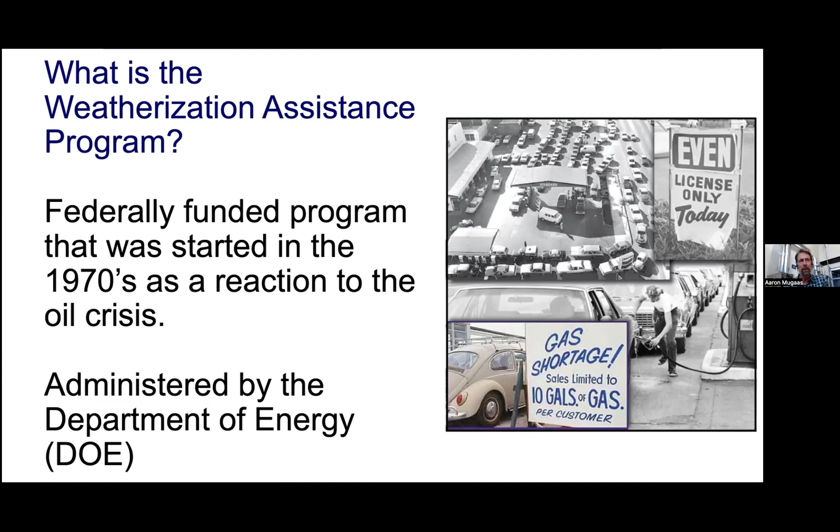Weatherization's a federally funded program, started in the 70s, and started in Maine. Community action agencies started just helping people make their homes more energy efficient by insulation and air sealing. And it's real rough and dirty work, right? I call it the front lines of energy savings. Besides the reduce, reuse, recycle that we all probably should be doing every day, this kind of work is kind of the front lines, the things that need done in most existing structures in America. The DOE is the main administrator of the program, along with some other participants also.

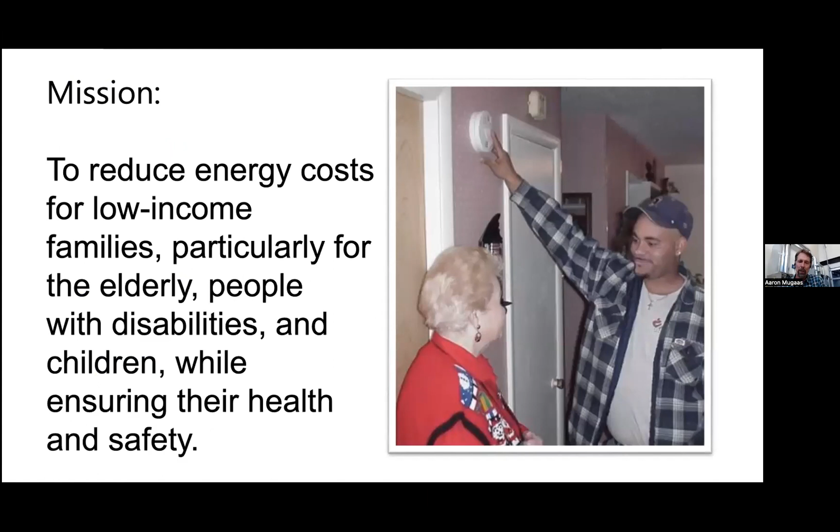So this is the mission: reduce energy costs for low-income families and the elderly, disabled, and children. And also we pay a lot of attention to the health and safety inside a home, indoor air quality, and things like that. Right now, the program supports a lot of jobs, and we work on a lot of homes every year.

$372 annual energy savings per home, and that's an average, but there's a pretty wide range of what we do to homes. It could be $50 a year, or it could be $1,000 a year. Depends on the age of the home and what we ended up doing on the home. So we've affected 7 million families since 1976.

Who does weatherization work? People wonder what this weatherization is. So the community action agencies throughout the country, here in Bozeman we call it the HRDC, the Human Resource Development Council, but there's a lot of different names. But they all are set up and generally federally and locally funded to take care of issues in communities. And one of the things they do is energy assistance. So they help people pay their power bills when they can't pay their bills.

And then the weatherization program piggybacks on that, and we work on those clients' homes to make them more energy efficient. So what do we do on houses? We are basically a shell program. It's the very unglamorous part of energy savings. Nobody ever sees most of the work we do.

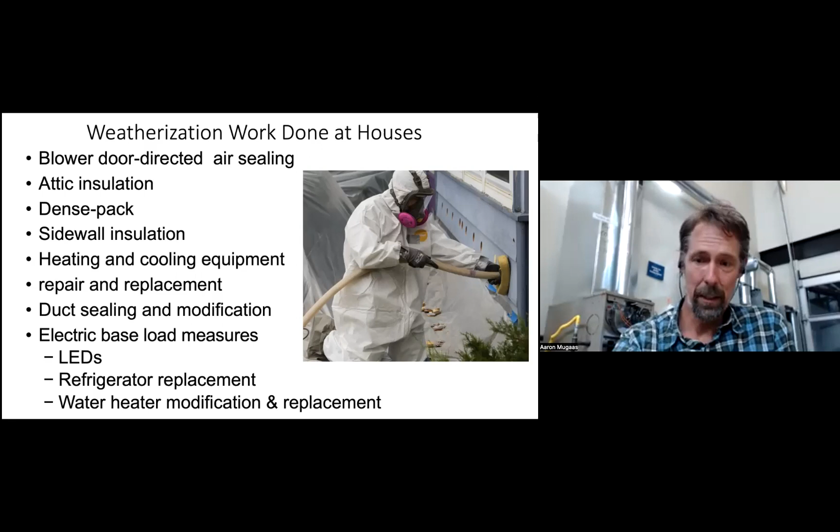At some point along the way, the DOE decided we kind of need to do this work consistently throughout the country and use the best practices that we could. So they started these training centers in the 90s. MSU got a grant, I forget the exact year, but it was the early 90s, through the extension service to administer training.

I had a neighbor over here on Peach Street in Bozeman who, when I told him I was doing weatherization work, said, "Oh yeah, I used to do that back in the 80s. It was just a bunch of hippies with caulk guns." And it's evolved greatly from really basic, common sense work to a really structured system. We use a lot of building science concepts and diagnostic tools now to do the work.

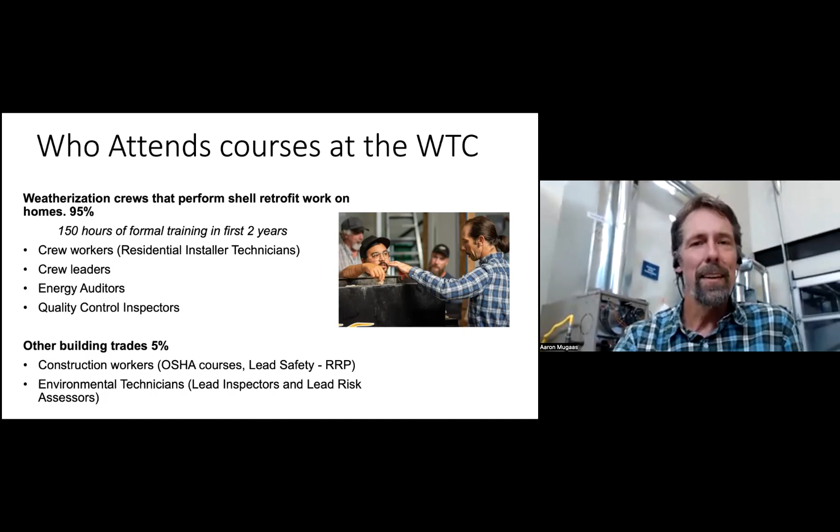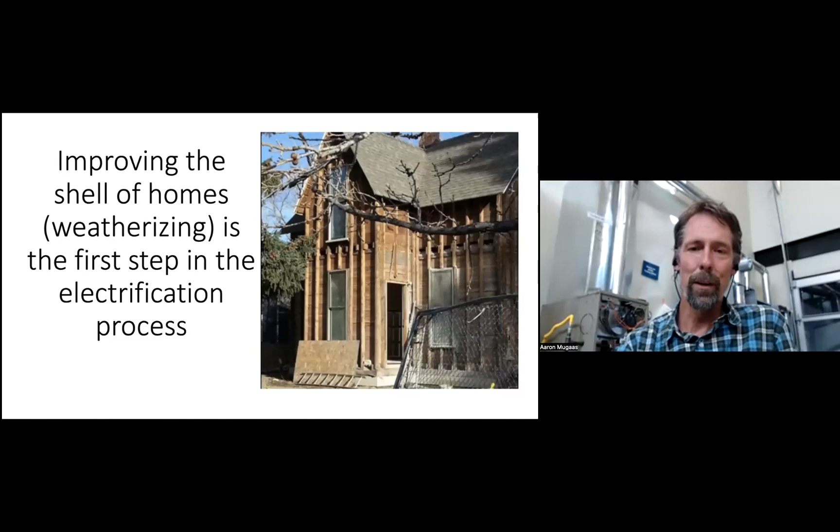But improving the shell of the home, or weatherizing, is probably the first step in electrification, especially if we're talking about putting in cold climate heat pumps. The shell needs to be pretty darn good before those things are going to work efficiently and effectively. So I'll turn this over to Brian right now, and he's going to talk a little bit about some building science concepts and just a little bit about what it means to work on the shell of a home.

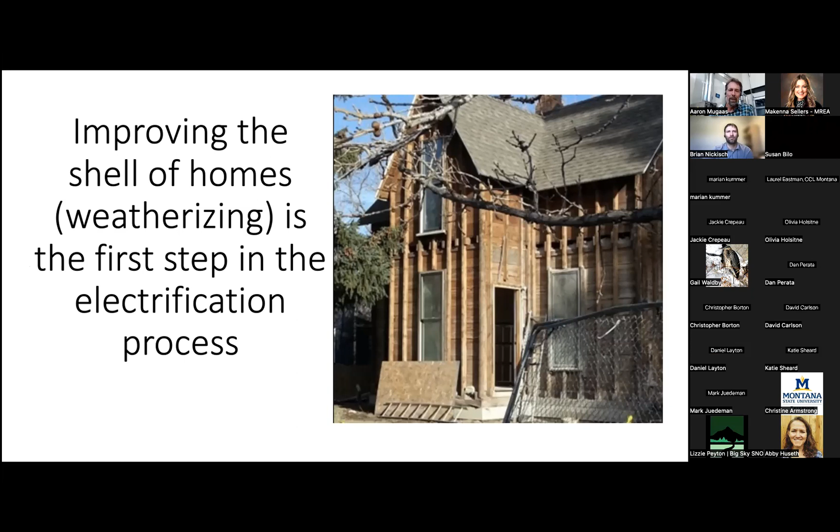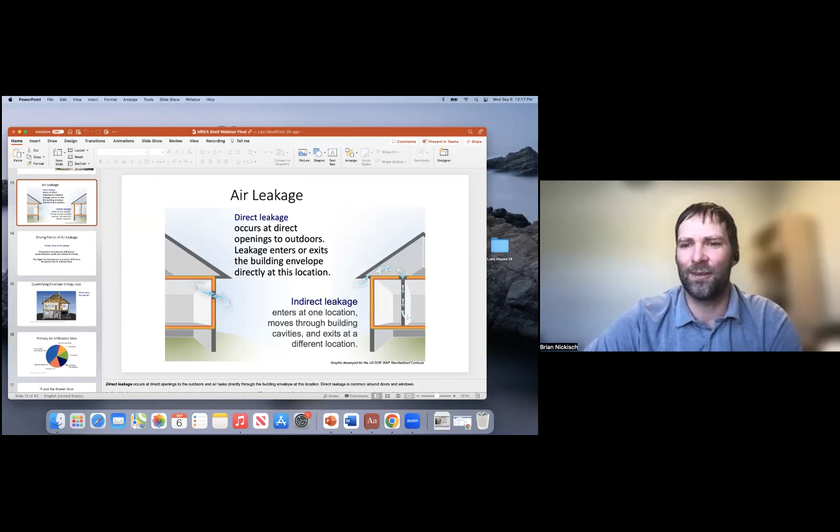All right. Well, thank you, Aaron. As Aaron had mentioned, as we go through and we look at weatherization, it's morphed into much more than the hippies with caulk. And so really we're taking a scientific approach to what we're doing and really trying to track down airflow. Basically, as we pay to heat and cool our home, that is going to be really expensive air. So we want to make sure that that air that we've conditioned stays inside the house.

So as we look at a home, we're going to have both direct leakage, where that's just holes directly to the outdoors, or also indirect leakage, where we have holes that come in through the openings in the walls, through the attic, any number of other penetrations that can occur in the house. So anywhere we have plumbing or electrical or any sort of holes that get drilled inside the house to bring in the things that we need, that represents an opportunity for air to escape. So we want to make sure that when we're paying to heat and cool that air, that it stays where we want it and it's not leaving the home.

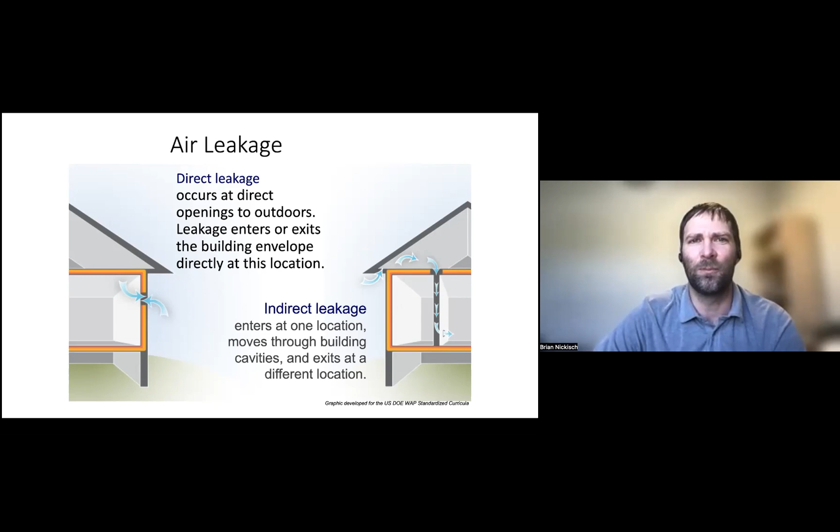When we look at air leakage, the biggest thing is it's driven by both temperature and pressure differences inside and outside the house. So if we have a higher temperature or pressure difference, the airflow is going to happen at an increased rate. So the higher the temperature is outside relative to the inside, or the colder the temperature is, the more quickly we're going to lose that conditioned air.

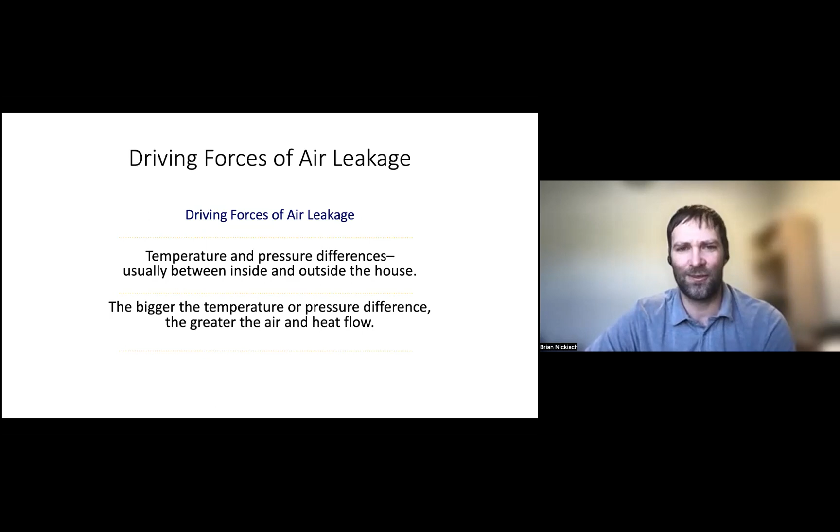So by identifying all of these different sources of air leakage throughout the home, we're hoping to slow down that airflow. And by slowing that down, that allows us to heat and cool less, and we get more bang for the buck as we're paying for that. And the biggest thing with this is, as we get to those extreme temperatures, those really high or really cold temperatures, we're going to have an increase in that heat and airflow.

So this is a picture of some common sites where we can have air leakage. So things like recessed lights, dryer vents, electrical outlets, the attic, kitchen vents, the crawl space in our homes. All of these are areas that have air leakage from the conditioned living space into either the attic or the outdoors. So by controlling this air, we're able to make that money go further. So we're using less fossil fuels or electricity in order to heat and cool the home.

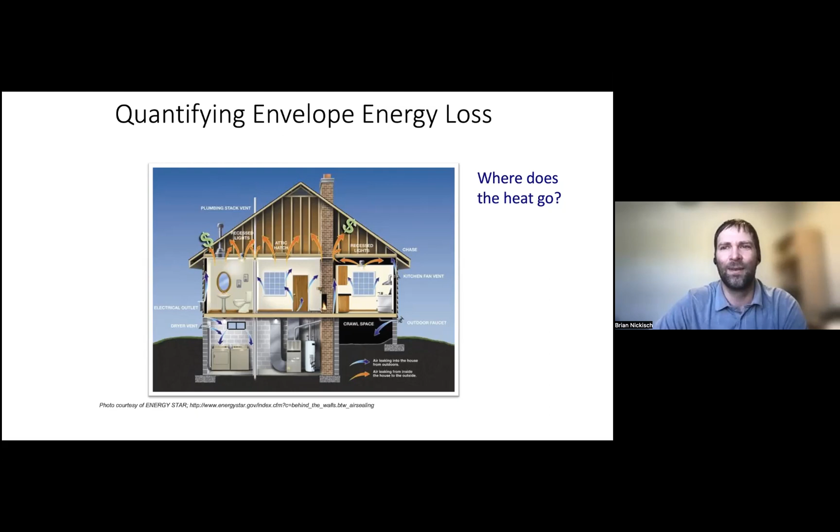So when we get to that nice temperature that we like, it stays there for a longer amount of time if we're able to control this air leakage.

The primary sites we really focus on with the weatherization program are mostly the floors, the walls, and the ceilings, dealing with the insulation. We have gotten to the point where a lot of the time we make homes really, really tight, and we need to actually install some mechanical ventilation to make sure that the house is getting the right amount of airflow and isn't building up indoor pollutants. So we also have that aspect. So just between those two measures, we're really looking at over 40% of the air infiltration.

If we do have doors and windows that can potentially be replaced if they're in really bad shape, typically these are more difficult areas to try to get the cost savings from replacing. But if we're able to combine that with the air sealing methods and the insulation, it's actually able to allow us to sometimes create savings that will be able to pay for new doors and windows.

And contrary to the air sealing measures that we typically focus on, a lot of the clients, when you go in there as a weatherizer, assume that they're getting new doors and windows, and that's usually not necessarily the case. But as we go through and change some of these air sealing measures, that cost savings can bleed into being able to replace some doors and windows.

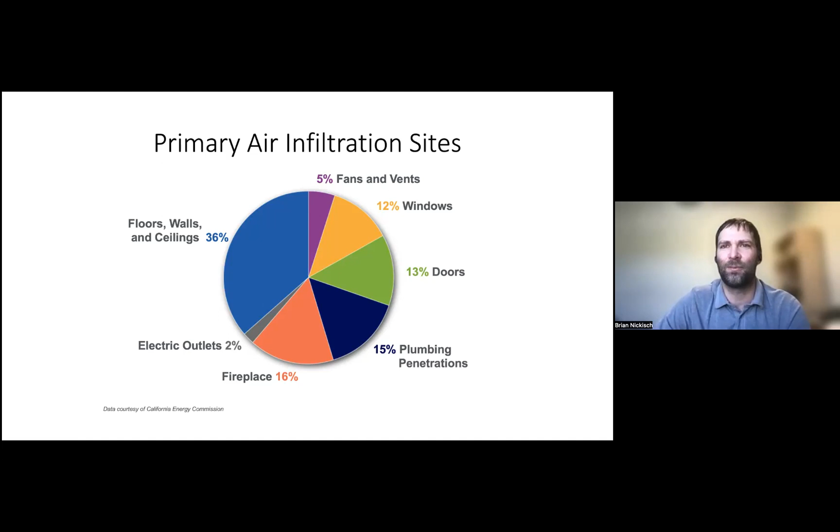And as we go through and actually look at homes, it's very difficult because we can't see air and we can't really see the movement of air. We want to make sure that we have the right tools to be able to diagnose that. So we can actually create a pressure inside the house that will allow us to see where the air movement is. When we pressurize or depressurize the house, we can actually pull air into the house and see where the leakage is. And that is going to provide us with the best air sealing opportunities.

Here we can see that on the left, we have a kitchen soffit without the blower door running. So that would just be under normal conditions. These darker areas are going to be the areas that are colder. And then you can see as we turn on the blower door, we actually see much more airflow coming through here. The blower door is really simulating about a 20-mile-an-hour wind blowing on the house, which isn't uncommon for a lot of days, especially in areas like Livingston and Great Falls around the state. So it's not an unrealistic amount of pressure that's being put into this house.

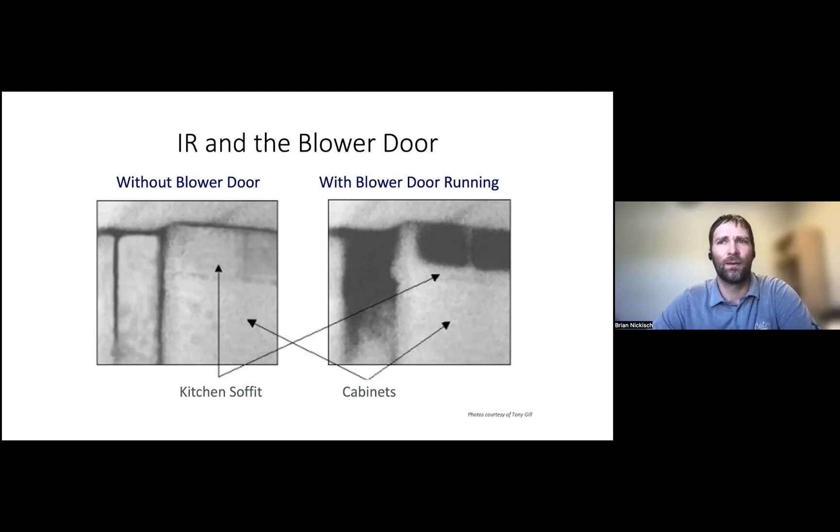And this is another picture just showing the effect of the airflow. As you look along the framing, that's one of the spots we aren't going to be able to do a whole lot about, because there's always going to be a deficiency in insulation there. And as you turn that blower door on, you can see these streaks showing the effects of the airflow as it's coming into the house. We have a light that's probably around 84 degrees, and this air that's coming into the house is actually quite warm.

So as we go through, we want to try and seal that off, because as we have that air coming into the house, it is going to be changing the temperature of our conditioned air. If we're paying to heat and cool, we want that air to be in the house and circulating, and not necessarily communicating with the air that's outside.

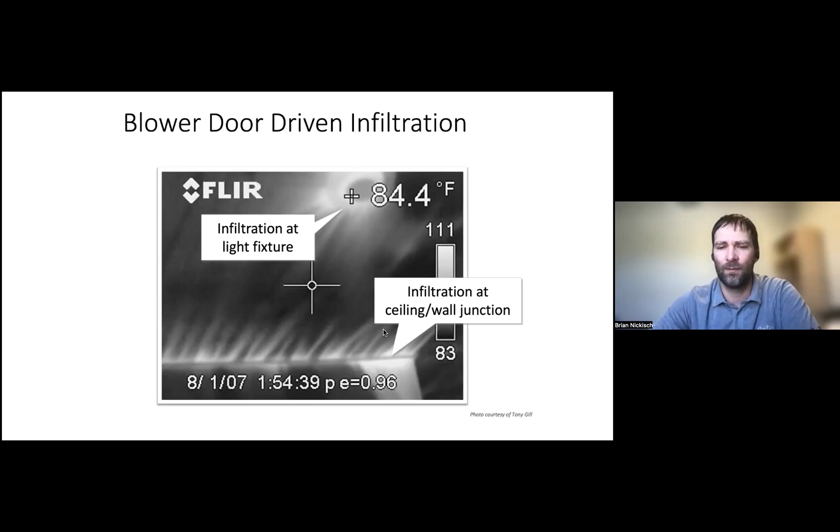When we look at a building, typically we have several different layers that are involved in this. And some of the layers we can help out with air sealing, and some of them there's not a lot that we can do. So having a good air boundary or pressure boundary with some drywall, and then creating some air sealing with having a really good continuous layer of insulation.

And the building materials with this, the nice thing is typically these values are just going to be added together. So the R value that you see on your insulation as you're installing that into the wall, that's actually going to be a value that's added to the drywall, and the framing and the plywood and any of the building materials that are put in. They all have a small amount of resistance to that heat transfer. So if we have a really, really high R value, then that's going to slow the heat loss from the house. So we're slowing that air movement if we have a high R value.

So as we look at that, typically the higher the R value, the better we're going to have that resistance to the airflow. And we just want to make sure that this is also a continuous barrier. So if you have insulation, it doesn't matter if you have a very, very high R value. If it's not installed properly and it's not performing correctly, then it's not going to have that same rating that you get on the package there.

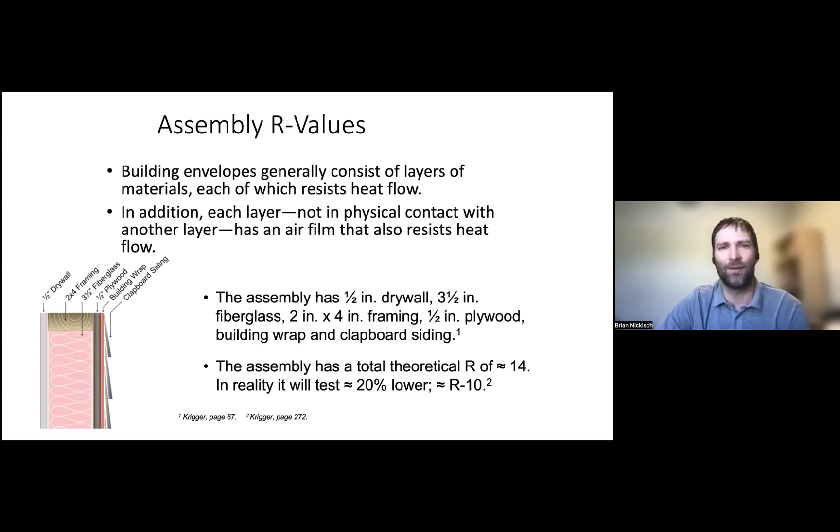So as we look at the priorities of a weatherization crew, the first thing is going to be looking at that air sealing, and again, making sure that the air that we're heating and cooling is staying inside the house. And so the opportunities for the air sealing are going to be determined by the blower door and then the zone pressure diagnostics. So with all the equipment that we're using, we're just making sure that the air is flowing throughout the house and we have as much control of that conditioned air as possible.

And in addition, with that air sealing, if we have any sort of holes in the HVAC system and that heated and cooled air does not have the ability to get to where we want it, we can go through and actually seal it up as well. So there are tests that we can use to see how leaky the ducts in the house are. And then once we have the air sealing and we have that air controlled and going where we want, we can then look at adding insulation in.

So from the attic, to the walls, to the floor cavities, all of this is trying to create a thermal boundary around the house that allows us to keep that conditioned air inside. So if we don't have control of where that conditioned air is going and the duct system is leaky, then the insulation isn't going to be as effective.

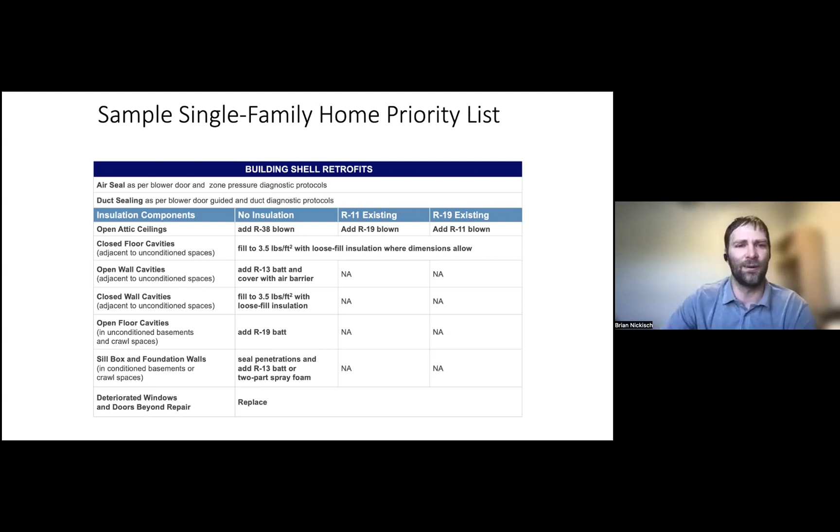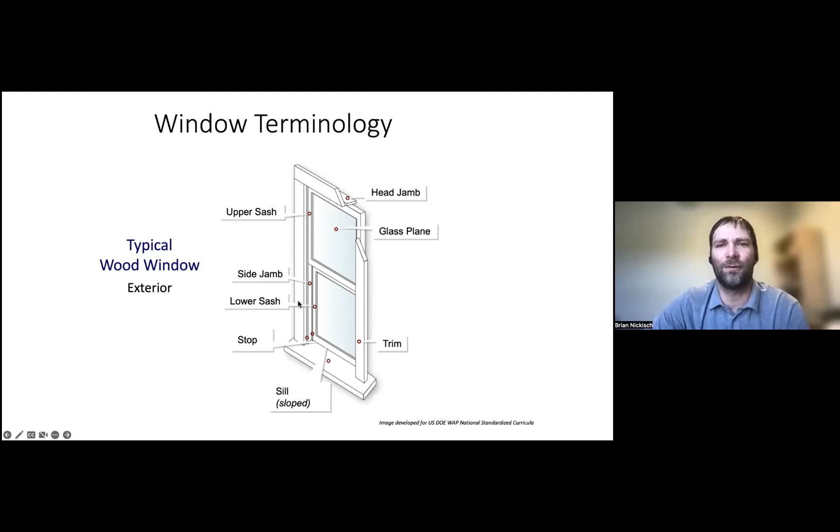But in the weatherization process, we're able to train employees on all of the different parts. So if a window isn't functioning properly, if it's not operable, there are different things that we can do. So rather than just simply replacing the window, by adjusting the way that window is hung or the way that it is in the opening, a lot of times we can actually fix the issue without having to do a full replacement of that window.

So when we look at fixing windows or doing the treatments, if there's any sort of broken glass, obviously that's going to have a huge impact on the ability for that air to flow through. Or locks: if we don't have a good seal, we'll have some airflow that is able to come through if we don't have the windows locked together. If the weather stripping is old and not performing well, and the interior trim as well. So all of these are different areas of a window that can have leakage. And these can all be addressed a lot of times without having to replace that window and, again, going through that very large expense.

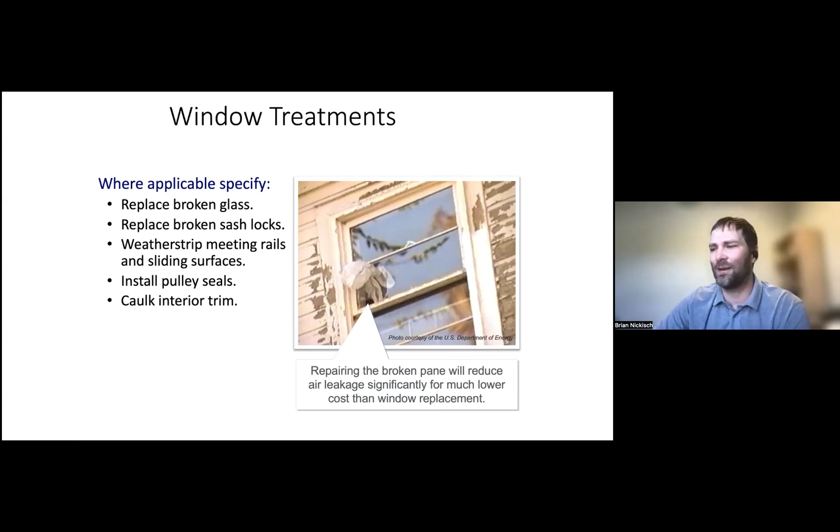And same thing with the door. Doors, oftentimes throughout the history of a house, are going to settle and not necessarily be performing or hanging the way that they were installed. So educating people about how to make adjustments for doors can save a lot of money on a door replacement. Mobile home doors especially can be several hundreds of dollars, and trying to get energy savings on a door when it costs several hundred dollars, it could take 50 to 100 years to pay that back. So just making these adjustments as a weatherizer, putting weather strip in and doing some more basic measures, can actually provide the same energy savings and not have to replace an entire door.

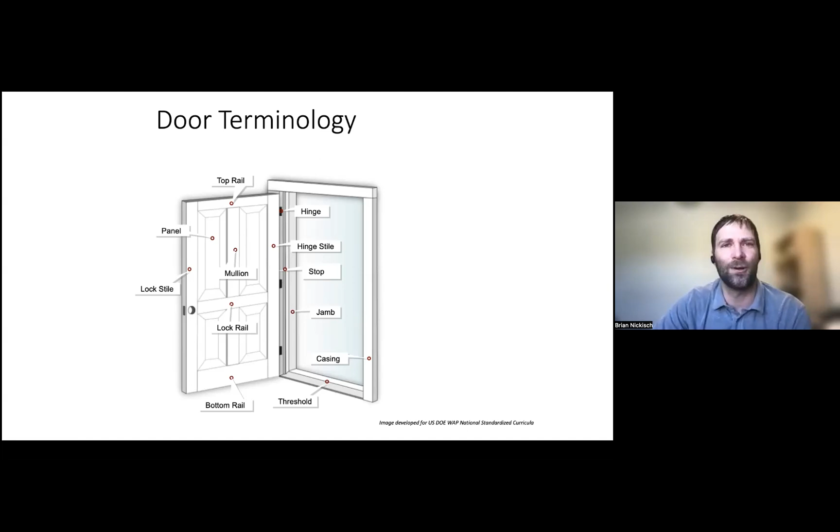So again, just looking at weather stripping, door stops, door sweeps, making sure that it has a really good seal to prevent that air leakage, making sure that the locks and hinges are working properly, and just making sure that the door is in a good, safe working condition.

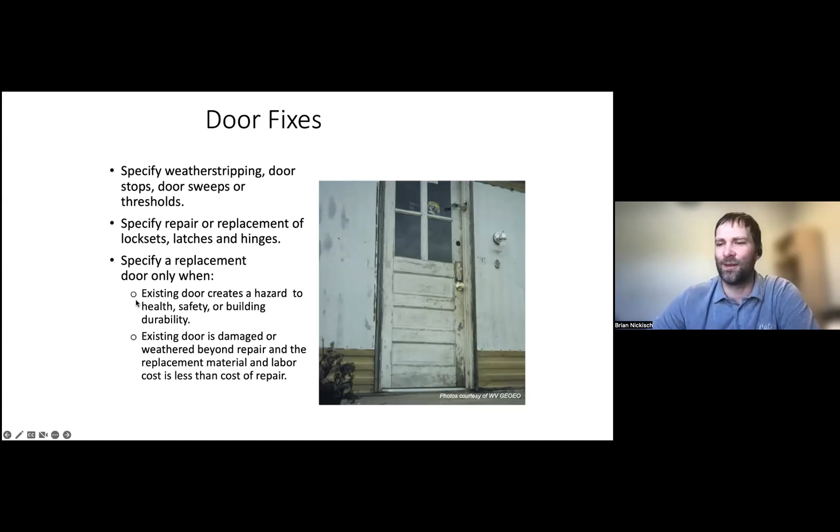And once we go through and look at the appliances, one of the things that we want to look at is the energy consumption of a house when we take out the heating and cooling aspect. This is a big part of the education for the clients, making sure that they know that heating and cooling takes up a pretty big part of their electric bill, but there are always going to be things that can be reduced that aren't based on the season. So typically the summer and the winter are going to see higher bills for a lot of houses. And so we want to level that out and see what an energy bill would be without taking into account that heating and cooling. So things like lighting, which is going to be used year round, water heaters, and then looking at the water usage by potentially installing some low flow water fixtures.

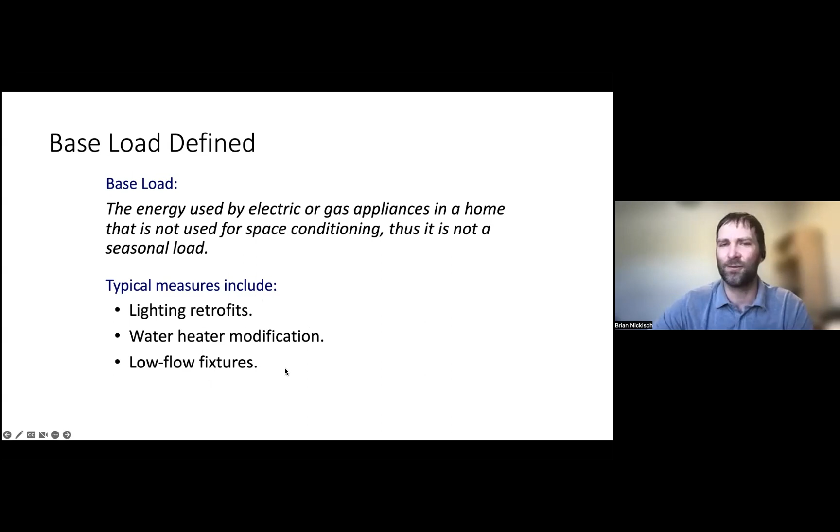So the base load does have a lot of different factors that can affect it. Homes with a higher number of occupants, you would expect to have a higher base load. The size and efficiency of the equipment, we want to make sure that it's appropriately sized, and the habits of the occupants. So it's not necessarily going to be enough to turn your lights off if you're not in a room, but all of the small things that occupants can do and the ability to educate them about where their energy use is, it's all going to contribute to this reduction in energy. So educating the clients is going to potentially help out with reducing the base load energy use. So that's going to provide year-round savings.

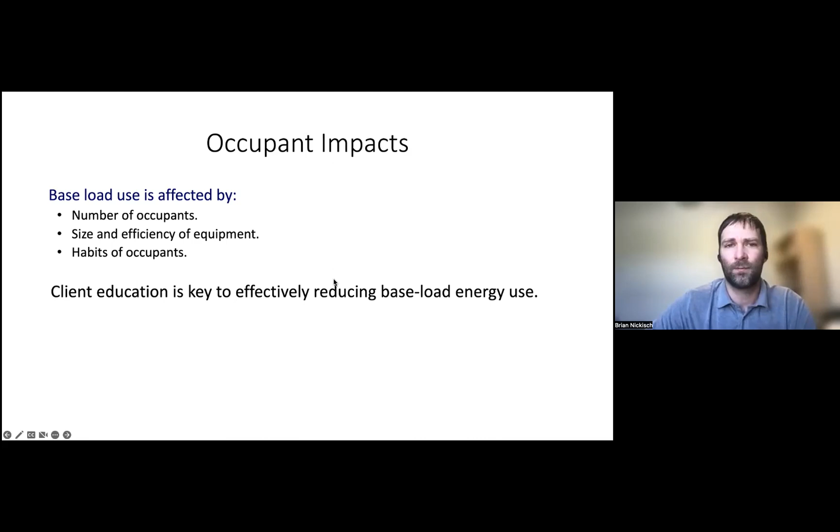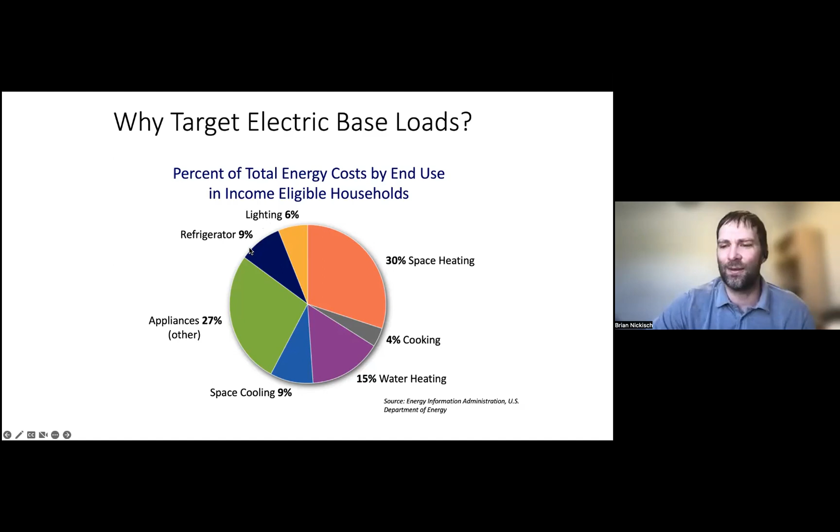So with reducing the water heater settings, the recommended temperature for energy efficiency for a water heater is going to be 120 degrees. This is the minimum temperature to be able to keep bacteria from growing inside the tank. And simply reducing that temperature from 140 degrees down to 120 degrees can potentially mean $100 in energy savings a year, which is pretty significant, especially for a lot of low income clients that we're dealing with. Every dollar that they can save is going to go quite a ways.

And this is a measure that really is free, just turning that down and making sure that their water heater is set to the right temperature. All that is is turning the dial. So the ability to save money there is, again, virtually free, and they're going to have that right temperature water and still not have any health hazard.

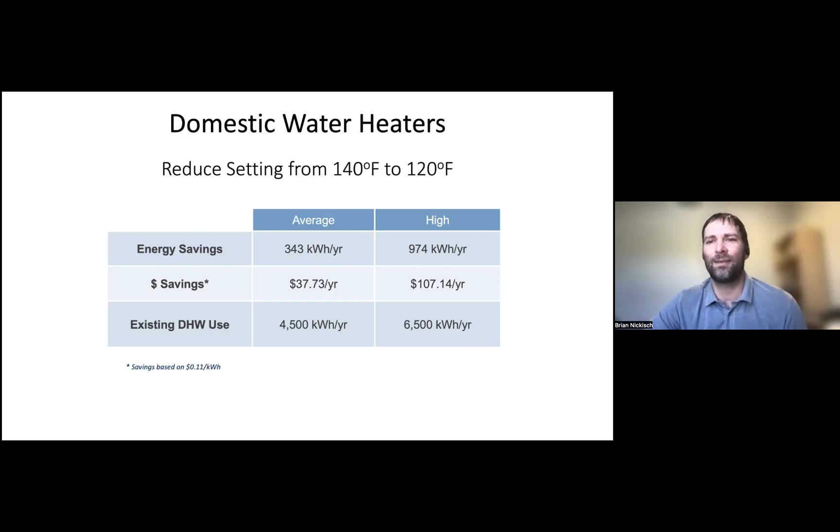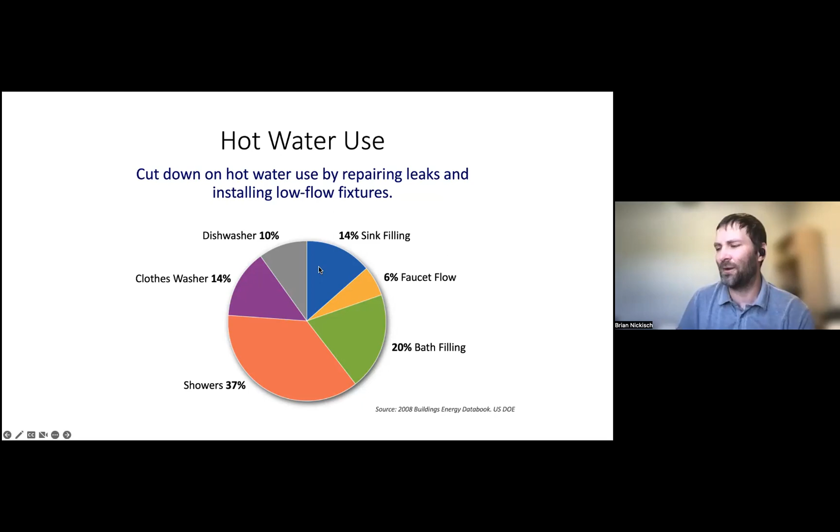So going through, just looking at some of the different uses for the hot water use. So, washing your clothes in cold water versus warm water, taking shorter showers, less baths, and installing the low flow aerators and low flow shower heads can have a significant impact on that hot water use as well. So in addition to decreasing the temperature, we can also adjust these areas and educate the clients about these possibilities of these areas of free energy savings.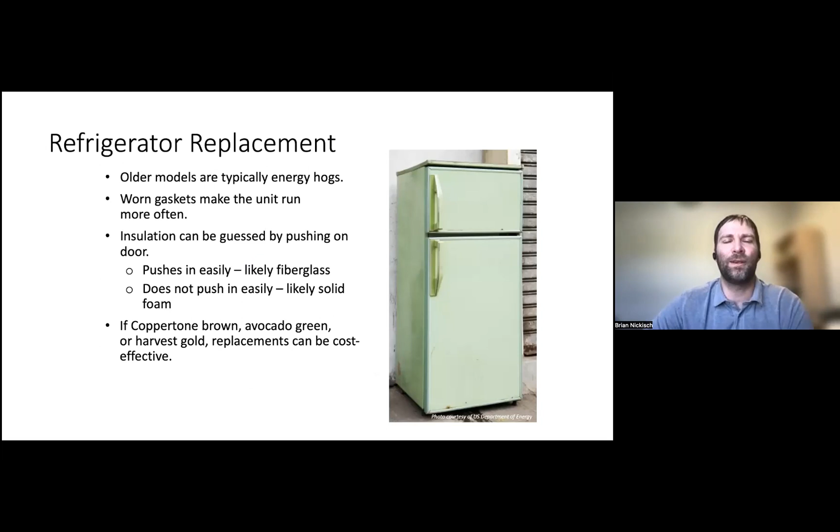Refrigerators are typically pretty expensive, and looking at this, the biggest thing is just making sure that a new refrigerator being brought in is going to be an Energy Star model and not just another energy hog. For lighting, LED lighting has come a long way, and the price has really dropped. I know that at Costco in particular, you can usually get the Northwestern Energy discount for that. So an 8-pack of bulbs is usually about $3 at Costco when they have that rebate going. So seeing that, the 10% usage drops down to a lot less, and you don't have to sacrifice the quality of lighting there.

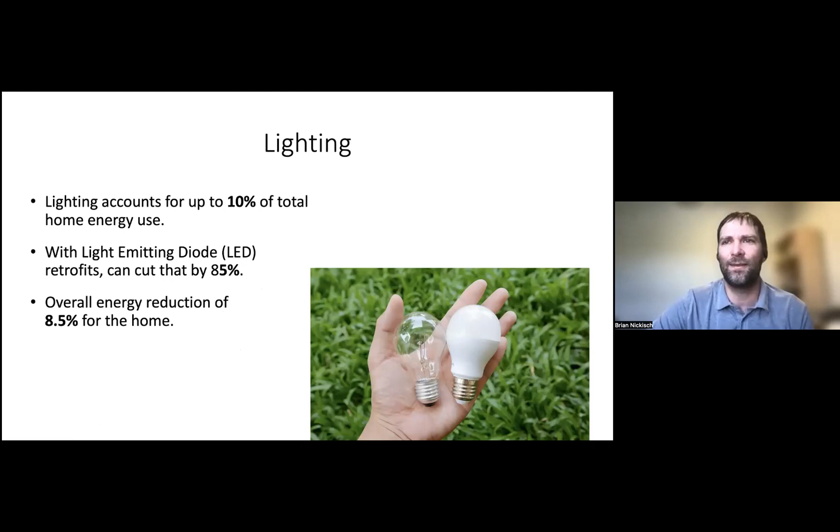And so really this kind of sums up what we're trying to do: we're trying to go through and create energy saving opportunities that intersect everybody's interest, and it's not going to have any sort of sacrifice in performance. So customers have their appliances they're comfortable with. We have the manufacturers that are there, and then the utility program. So all of these entities are working together. So we want to find kind of this Goldilocks zone in the middle that's able to produce something that's going to use less energy while not sacrificing the performance.

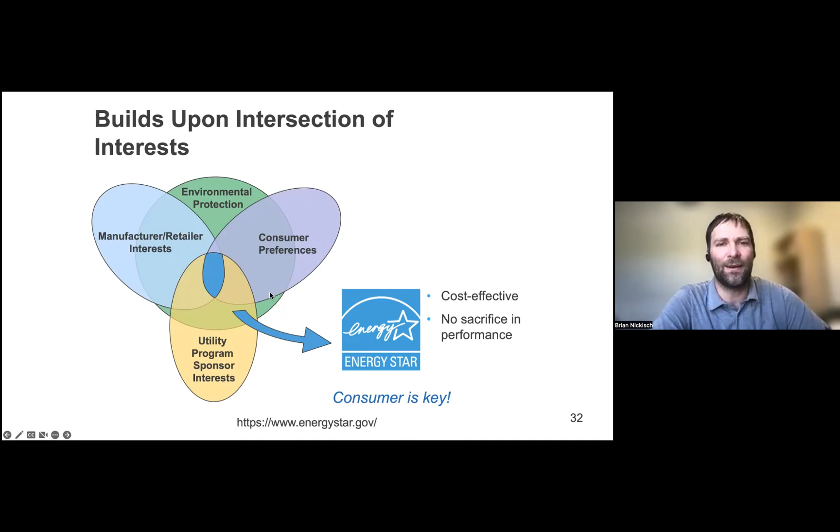And again, as we look at this, education really is the key to this. So as we begin talking about the process, whether it's weatherization or energy efficiency, all of this results in a need to be able to educate people not only about what technology is out there, but actually to be able to show these tips and these energy savings that can be cheap or free that they can do to help their home. So even if they don't necessarily have the money to make all these upgrades, there are still things that they can do to make sure that they're going to be reducing their energy use.

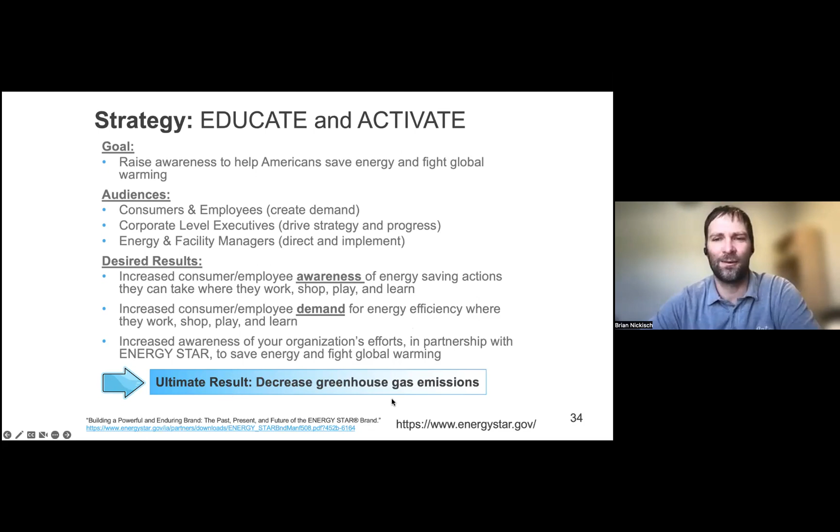Because ultimately what we're looking at is decreasing the greenhouse gas emissions, because saving money is going to result in this. So if they're decreasing their energy use, not only is their bill going to go down, but we're also going to have that decrease in the greenhouse gas emissions there. And for that, educating them is going to actually provide these opportunities to be put in place. A lot of times it's difficult to have a very expensive refrigerator, but the amount of money that they're going to save over the life cycle of that refrigerator typically is going to pay for that appliance by itself.

You will find different motivations for that. Some people will be environmentally motivated, and that's fine. If people are making the choices to buy Energy Star appliances, it doesn't matter whether they're just trying to save money or they're trying to save energy. Ultimately, the goal is the same. We want to make sure that everybody is making decisions that will reduce the energy use, because in the grand scheme of things, that's going to be the thing that allows them to save money.

And having a brand like Energy Star, I'm sure most people have seen the yellow tags all around the stores as you go and look for appliances. So one of the few sources that is actually still pretty well trusted and respected is this Energy Star label. So the Energy Star program, in the 30 or so years that it's been implemented, has been very beneficial to the customers and does have quite a bit of sway.

Okay, absolutely. So heat pumps, especially with the IRA funding, are definitely one of the major pushes that's occurring. And the nice thing about heat pumps is they have a much higher efficiency typically than your typical air conditioner or heating unit. We're using the same technology, we're just using refrigeration.

What the heat pumps are able to do is just move the heat from inside to outside. So if we have hot air on the inside and we want that heat outside, we're able to transport that in through compression and expansion of a refrigerant. And the same thing in the winter time: even when it's really, really cold outside, we have the ability to pull heat from the air and actually use that to heat our homes.

And so because we're using these refrigerants, these chemicals, as part of the compression and refrigerant cycle, if we put in 1 kilowatt hour of electricity, we're actually able to get 3 to 4 kilowatt hours of heating or cooling out of that system. So a lot of times you'll see that heat pumps are 300 to 400% efficient.

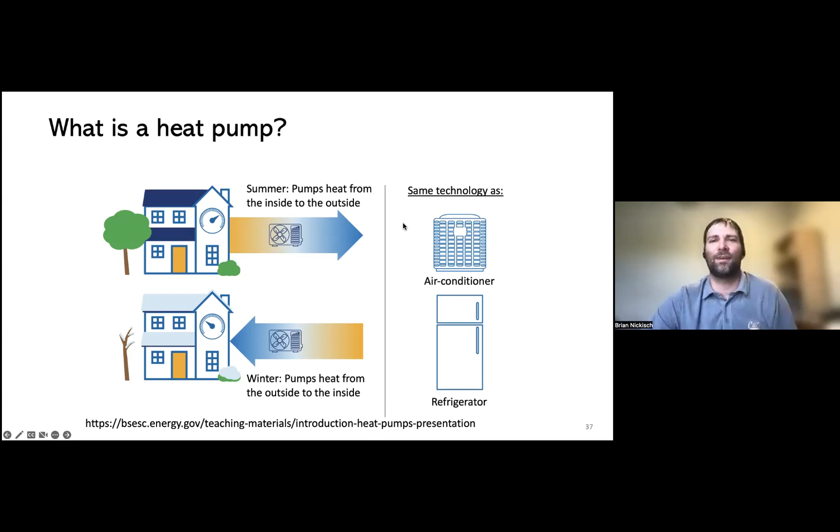Really what that is, it's using the refrigerant to get more BTUs than we would get with just heating or cooling that air directly. And so we'll look at that a little bit. Most of the heat that we get is going to come from the sun. We can get a little bit as we're burning the fossil fuels. So we get that heat from the sun, and it's able to be extracted by the heat pump

and then forced inside. So the nice thing again about this is the heating source is going to be free. We get that energy from the sun. We're not having to put a whole lot of electricity into this. We're letting the refrigerant do all of that work.

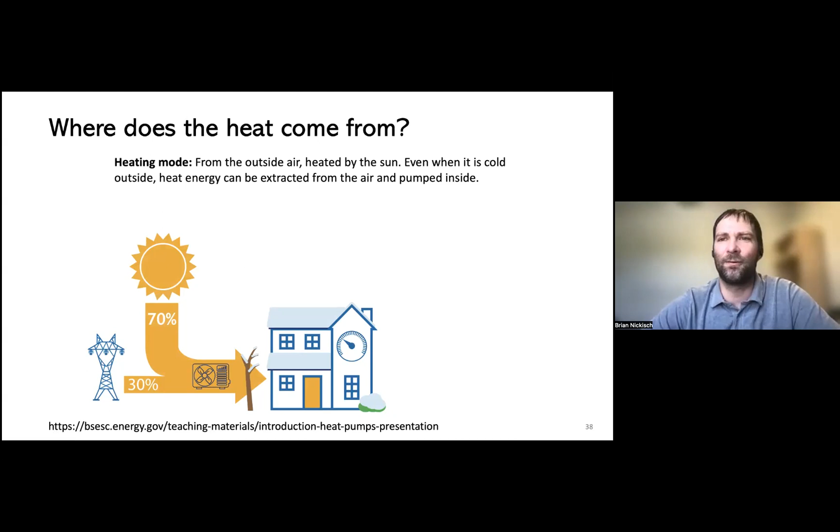And the same is true when we look at the cooling mode. We're just doing this in reverse. We have the air that is already there, so if we have warm air, we're just working on getting that out of the house. And so that heat is then pumped into the refrigerant.

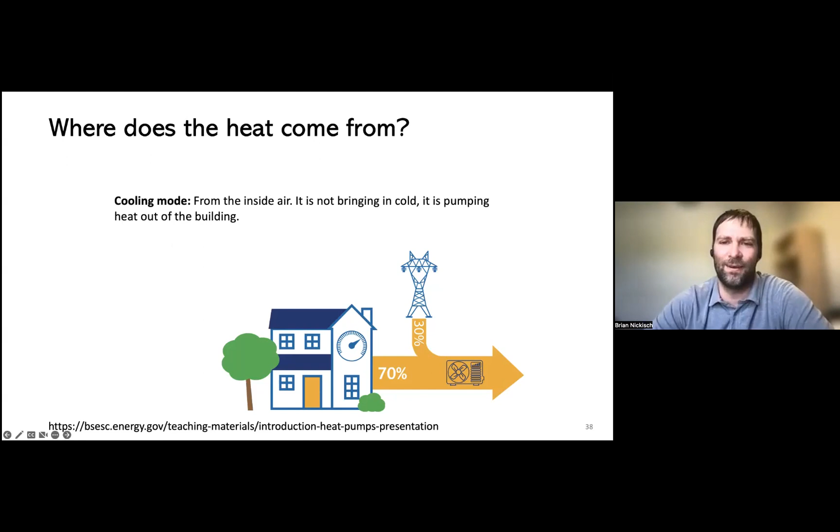And again, we're either compressing the refrigerant or allowing that to expand and expel the heat outside of the house. So really, when we're looking at the cooling, we're allowing this refrigerant to absorb all of the heat that's in the building, and then it's going to be expelled outside the building.

And there are several different names that you may see with heat pumps. They're all basically categories of heat pumps, and then they become more and more specific as you go down. But really, they're all performing the same function. The biggest thing now, especially in our climate, is the cold climate air source heat pumps becoming more and more viable. With these, we're able to get a lot of efficiency even at temperatures down to about 13 below.

Right now, the technology for cold climate heat pumps starts to really dwindle when you get down to 20 below temperatures and anything below that. That starts turning these heat pumps into electric resistance heaters, which have an efficiency of 100%. But we don't get that added benefit at these very, very cold temperatures. Part of that is really none of our furnaces work well at those very cold temperatures.

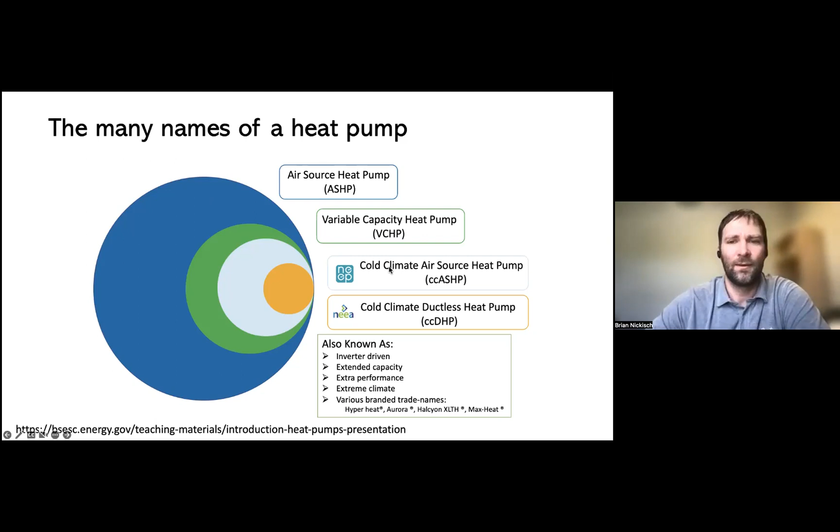So the standard, or the measure for heat pumps, is actually coefficient of performance. Our air conditioner units are typically measured in SEER, or seasonal energy efficiency ratio. So the newer units are in the 20 range. And so the COP is a little bit different because this is looking at the amount of energy that is put into a heat pump versus the amount that you get out.

So if we put in 1 kilowatt hour of electricity with these heat pumps, we can actually get 2 to 5 kilowatt hours of heating or cooling out of those systems. So we have a much higher efficiency as we start moving that air around versus trying to heat and cool it directly. And with all of our combustion appliances, that's exactly what we're doing now, directly heating and cooling that air. And so that's all subject to the air leakage.

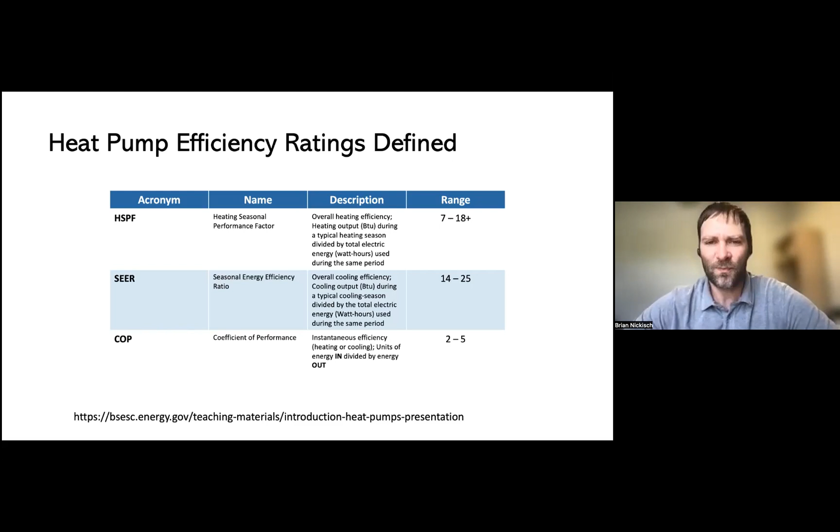So rather than trying to heat and cool that air, using these heat pumps allows us to get this increased efficiency by using the heat that is already in the air and taking advantage of these refrigerants that allow us to move the air in a very efficient manner. So as we look at heat pumps, really we look at the cost savings, because as we're putting a kilowatt in, we're getting between 2 and 5 kilowatt hours of heating and cooling back from them.

And the added benefit of this is many places in Montana don't have air conditioning. They may just have a heater. Well, because the heat pumps have the refrigerant, all we have to do is reverse that refrigerant cycle inside of these units, so not only do we get heating installed into a space, but we can also use cooling as well. So all of that is done within the same unit. You don't need a separate unit for the cooling. We can have increased capacity, just making sure that the temperatures are going to be where we want.

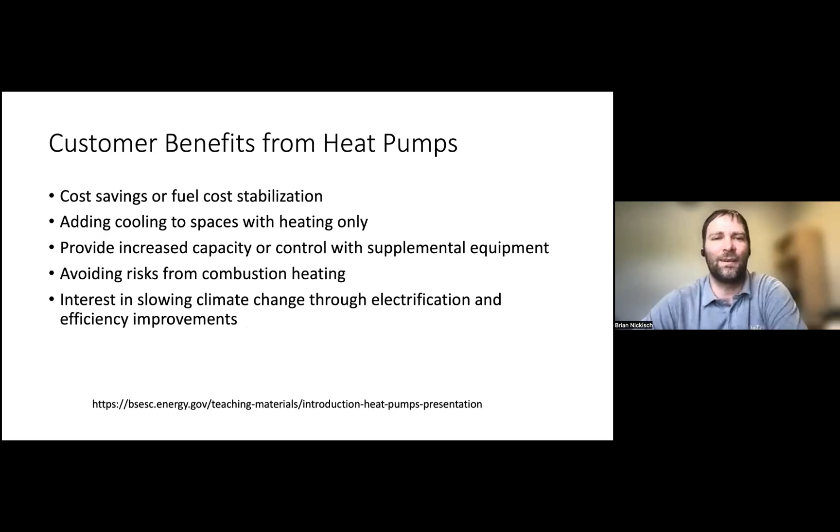And we avoid all of the carbon monoxide and other gases that are produced in this combustion heating process. So we're switching over from burning fossil fuels and going into electric heating. And with this we get this increased efficiency. So there is the advantage of being able to potentially have less greenhouse gases emitted through our heating and cooling needs, which, as we looked at earlier, was about 50% of the energy usage in homes.